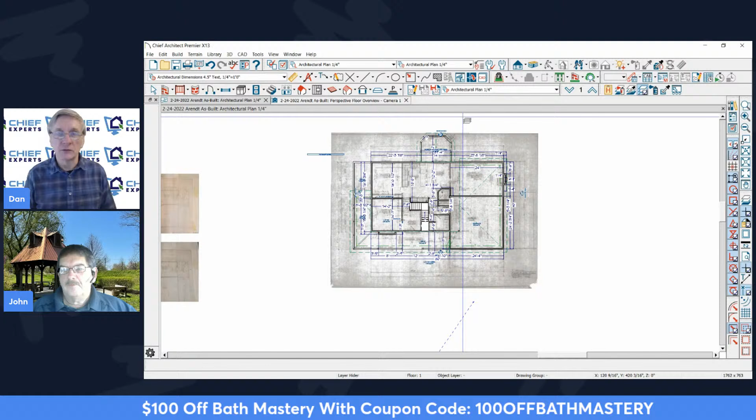Do you ever get a copy of a survey that you wish you had the CAD file for? Yes, yes. Okay, now here's the caveat to this one thing I'm going to show you.

Because sometimes - here's a project I'm working on. I've got the house out west of town that we're doing some as-built on, and they're going to add a whole bunch of additions. They got a lot of stuff going on in this house. So we've been doing - we did the Matterport scan on the whole house. That went really well. I'm not going to get into that right now.

We did a course on Matterport a year ago. If you want to check that out, Matterport's really cool. It's a neat system. And one thing I found out about Matterport is they have a little device coming out.

It's a little stand you mount your phone on, and you just go through the rooms and set that, and it'll do the auto spin on the rooms. So you can do your own scans without hiring someone. It's really inexpensive too - it's $60 right now to get this device. It's normally going to be like $180, something like that.

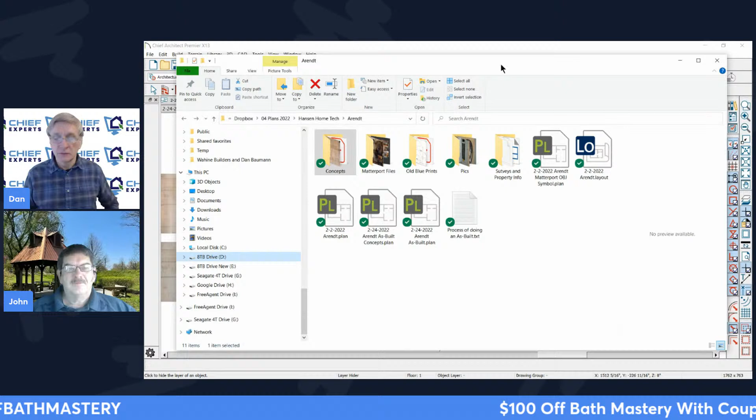I mean, you'll still need the Matterport - you'll need the Matterport account to have these different scans in them. Right, you know, I think that's their claim to fame. I don't think you can have them do the Chief Architect floor plan for it though. No, they won't, off your camera. You can if you get their equipment, but not off your phone. I haven't been able to find that.

Do you know that, John? Does anybody know? Will Matterport draw the chief file for you like Canvas will? I'm pretty sure they do.

Okay, I haven't seen it. I was looking for one day. I tried to get the DWG files, but they wanted like $800 for them. It's like, what are you, nuts? Maybe. It's a DWG, but it wasn't that much money. Well, because I went over a certain square footage, their price just jumped from a little bit to a ton. It was nuts. It's just like, okay, never mind.

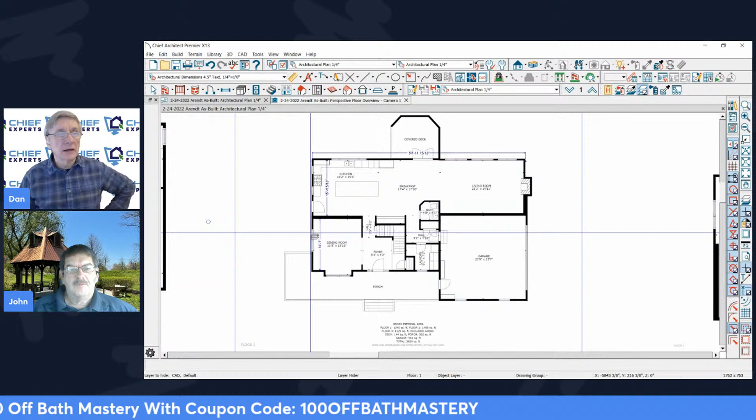But the thing is, they gave me these cool PNG files that look like this, from the Matterport scan. It's like, what do I need a DWG for if I got that? Right, that'll work just fine. I can trace right over it.

So those came with this particular house, and it was just over $3,100 they charged. I had a guy local here charge $475 to scan the whole property, and he did a few other things for us too on this project. It would have been between $275 and $425. So I thought for what we got, it was pretty cool.

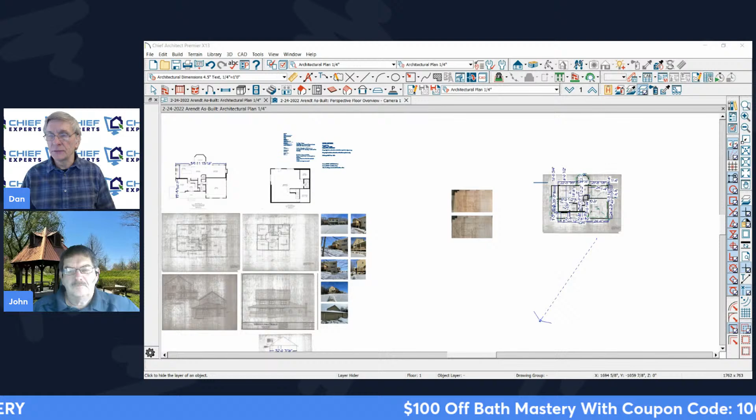But one of the things on this particular project, I've got a... sorry to go off topic there, but the owner, the contractor, sent me a survey. Okay, so it's right here. They sent me a PDF of the survey. And if you look at that, it's obvious that it was printed with a CAD program.

Oops, okay, come on. Trying to get my PDF over here on the screen so you can see it. It's thinking about something. What time is it? There it is, okay, so here it is.

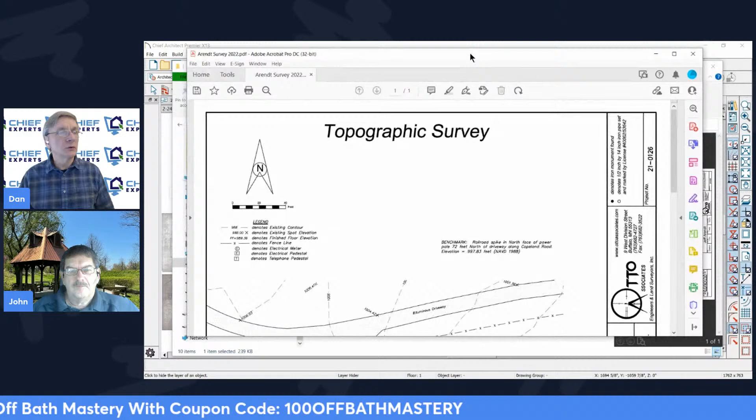So if you get a survey and it's like this, it's a CAD file. You can convert that to a DWG file for free, and here's how you do that. If you can't just call the surveyor and say, hey, send me the DWG file for that, I found a little tool you might want to check out. It's really cool. I just searched for PDF to DWG, and let me click on the link I'd saved here. So here's the website, it's called Convert PDF to AutoCAD.com.

So if you got any kind of PDF that looks like it might have been created with a CAD file - and I haven't read anything about this, I've only done it a few times - but the ones that failed were not CAD generated, they were hand drawn. So that's why I'm assuming that's the deal.

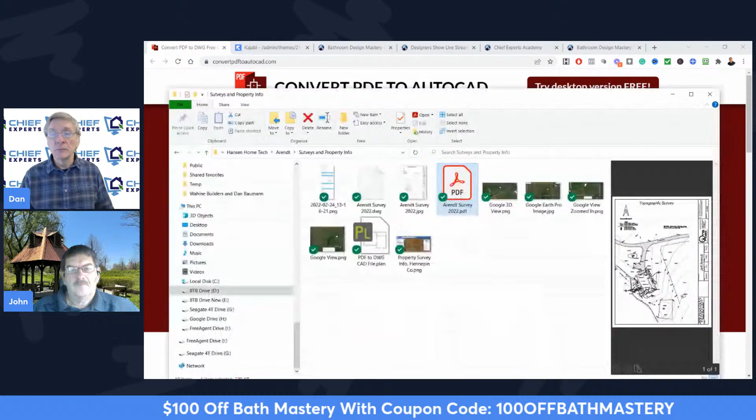So all you got to do is click upload. If I just take my PDF and upload it here, it's going to zip it through and convert it. It's going to give me a DWG file that I can download, and bam - I haven't read anything, I don't know anything more about it. Imagine if it was scanned off of a print, it wouldn't work either, probably. Probably not, but I don't know. So if someone wants to dig into this and let me know, I'd love it. I probably should read it.

I just thought of this right before the meeting. I got to show you guys this, because it worked really well, pretty cool. So all I did is click this, download the DWG.

As usual, what I do with Chief when I want to bring in a DWG is I never, ever bring the DWG into the plan I'm working on. The reason is because when you bring someone else's CAD file in, they'll probably have 200 layers in that file, or maybe less in many cases, but they'll have a lot of layers. Most of the layers aren't being used, but they'll still get imported, and that raises holy Cain with your layer list in the plan you're working on. So always open up a new plan and import your DWG into that, then massage the layers and lines you're working with.

So if I take this now and go grab that DWG file that was downloaded from the conversion... oh, that's already a plan file. What am I doing? Wrong one.

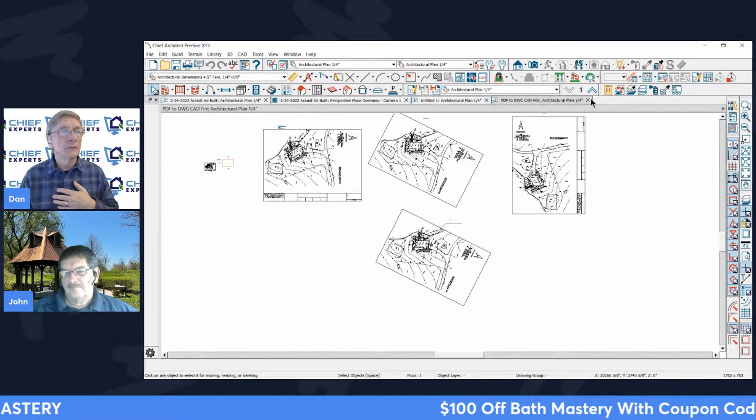Sorry, let me do that over.

Can you show us how to import the DWG into Chief? Here's the survey DWG - I'm just dragging it onto the screen. That's all you have to do, or you could go to Import DWG File from the File pull-down menu. Any file on the import list you can just drag onto the screen.

So then I'll go Next, and I always turn this on, and Next, and Next - that's important right there. Sometimes it might be done in feet, sometimes in inches. I believe this one was done in feet.

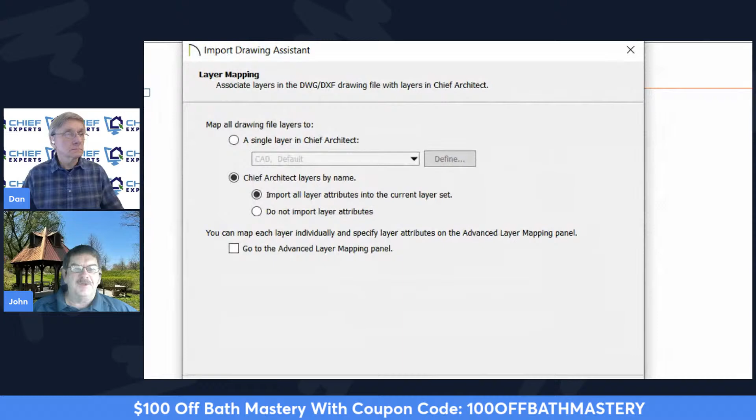The other thing that's really important when you're getting or sending DWGs to an engineer, you need to make sure you put it in a type that they can read. Like if they're not up to date on AutoCAD, you've got to get the version that will work.

Where's that again - I think it was right at the beginning. Maybe it's under export, when you export. You're trying to import it, but you can select different levels. That's a really important part, getting the right version of the program. So I always just do export the latest version, and if it doesn't work, I'll step back a little bit.

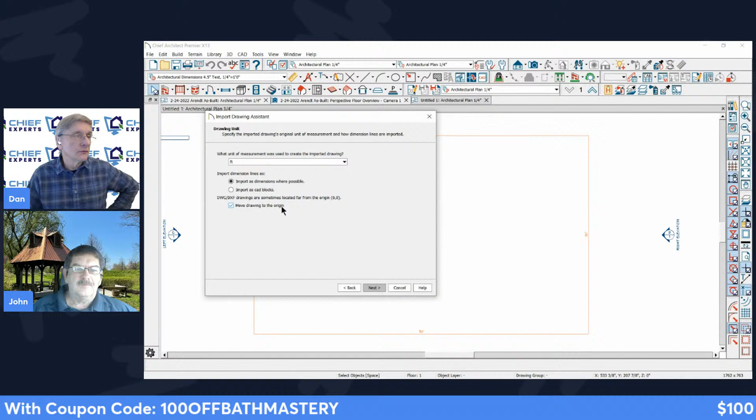Okay, so I'm going to go feet, import the dimensions, import as CAD blocks, and move drawing to the origin. Origin would be if the thing was set at zero-zero, which would be the middle of this orange box on my screen - it would come in there.

So then I just hit Finish, and there's that DWG scan that I got from that website. So it's all lines - that's not going to be one continuous line, it's going to convert it to individual items. The text is going to be lines, it's not going to be text, so you may end up deleting that and redoing it.

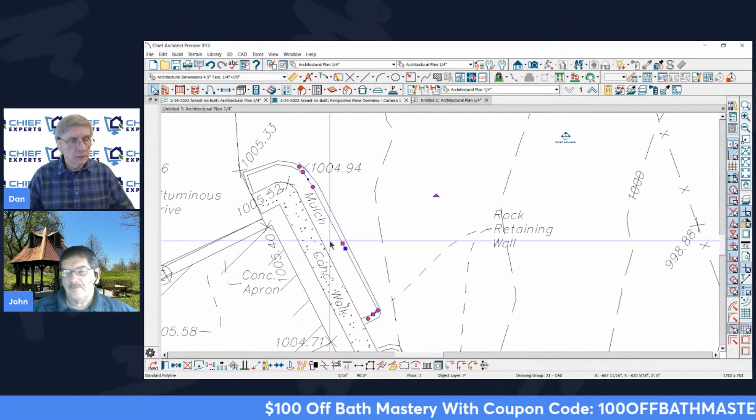And everything in this came in - did it come in one layer? Yeah, everything's on one layer. So doing the scan is not going to give you different layers for the different items. You're going to get one layer, which again isn't the end of the world.

So then you can just, if you have a dimension somewhere that you know, you can check that dimension and scale from that too. You can scale it like any other drawing. So I think the house itself was 60 feet.

So if I click on that line and open its dialog box and go to the selected line, then go to Number Style down here and switch it to feet and inches, I can see that something's not quite right there - it's not the right length. So this is not the right sized CAD file, so I need to convert this.

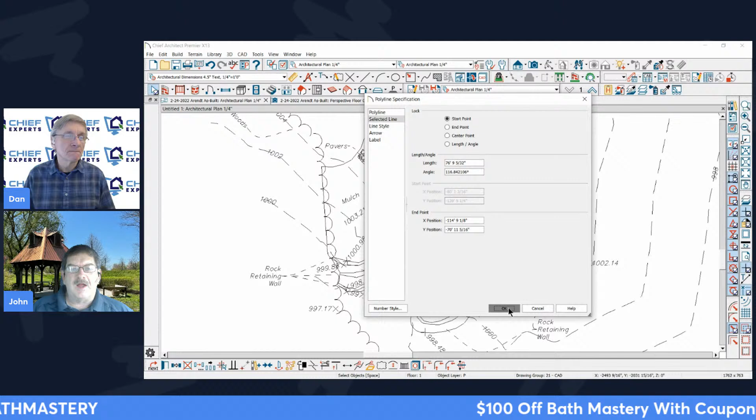So we should show them how to convert it, John. So how did you decide to do feet or inches, and how far off is it? I know for a fact that wall is 60 feet. I just selected that line, or find another line that has a dimension on it - the longer the dimension, the better.

So Number Style, right down here - when you click in a dialog you see this thing called Number Style. That changes the way the numbers display in these dialog boxes, doesn't do anything else. When I'm working on roofs, I'll always change my angles to pitch, so now it displays as pitch. In this case I wanted to see feet and inches instead of inches, so I changed it to that - now it displays as feet and inches. If I change the pitch, you'll see how that angle changed to a pitch. It's really nice - when working on different things in your plan, you can change the way it displays in the dialog boxes.

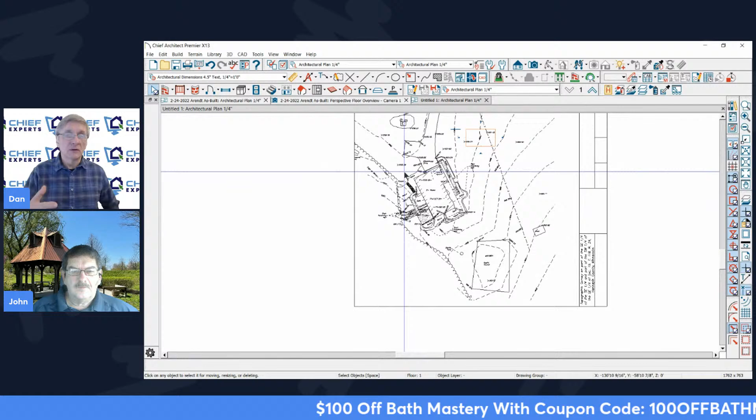So I had to rescale this drawing because it's scanned from a PDF - it doesn't know the exact size of it right off the bat. If you have a full-blown survey, you'll probably have a property line with a number on it - use that, use the longest number possible. Or if you know what size paper it was drawn on, you could use that. This one, I had no idea.

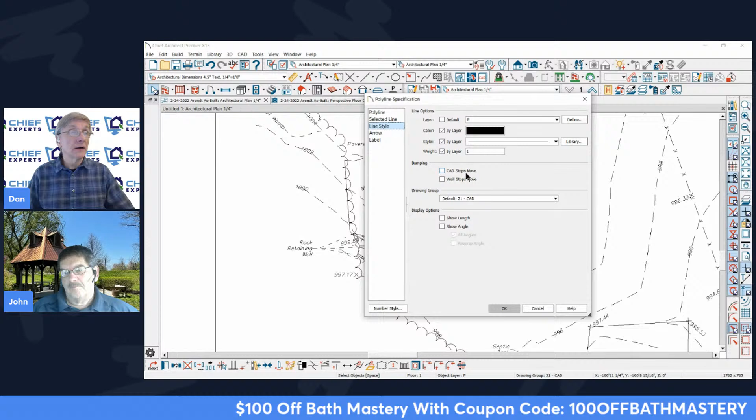So I'll rescale it using the same method we use for scaling a picture with an angled line. I'm going to go to line style and show the length of that line on the screen. There's the length of that line: 76.76 decimal feet, and I need that line to be 60 feet.

So what I'm going to do is select everything in my drawing. I'll just hit Control A. I've just hit Control A and selected everything in my drawing, and I need to rescale this down so that line is 60 feet, and it'll resize everything in my plan.

So we take that number, the number we want divided by the number it is. Number you want divided by what it is. I want 60 feet, I need to divide it by that number.

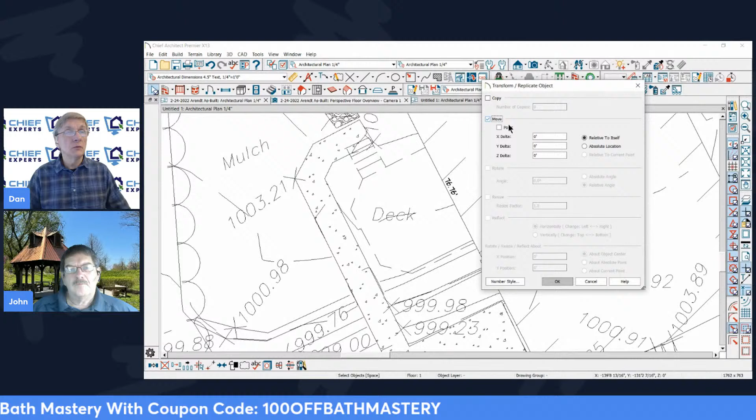So I'm going to go to my resize, or transform replicate, down here. I'm going to go move and put 76.76 feet. I like to convert it to inches. I don't know if you do that too, John, or do you still do this?

No, because you can do it from feet to feet, but you can't do feet to inches. Right, so 60 decimal feet, and I need to set this back to fractional inches. So I need to divide 720 by 921. I only use move to get this number, just to get the inches—I'm not going to use move when I'm done here.

Okay, so I'm going to uncheck it, and then go to my resize. It's not giving it—done. Oh, what's going on? Yeah, I got cameras in there—can't have cameras in there. That would do it. Got to turn those off.

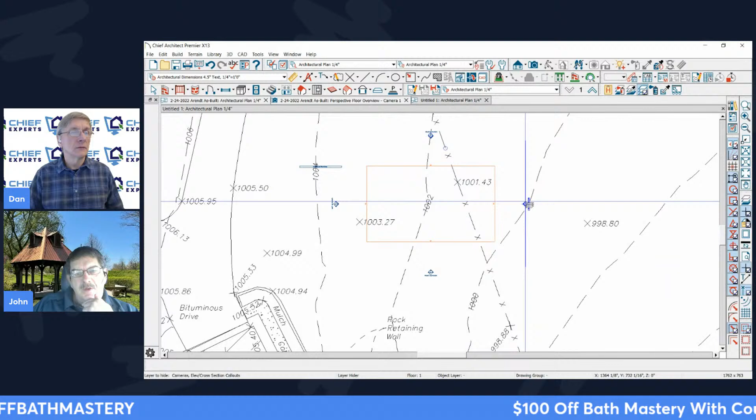Use my hide layer button—so I've added these icons, hide layers is one of them. Let's try that again. Okay, so transform replicate, and this time we'll check that we can resize. There you go—it's typically the cameras that do that.

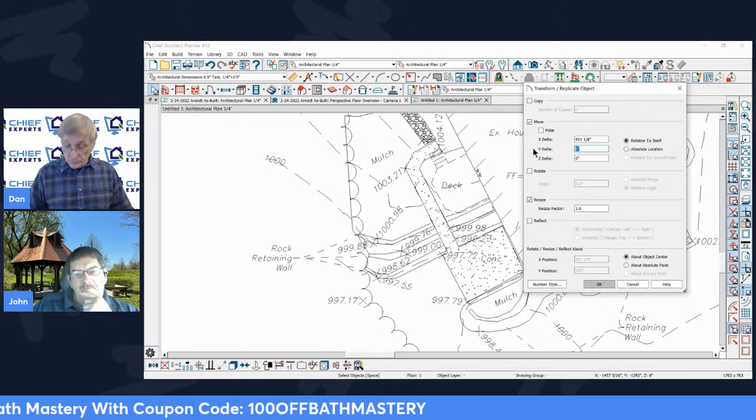76.76 feet by 60 feet gives me that many inches. So I'm going to go resize, I'm going to go 720 divided by 921. I'm doing all the math right in these dialog boxes. Okay, so there's my resize factor right there.

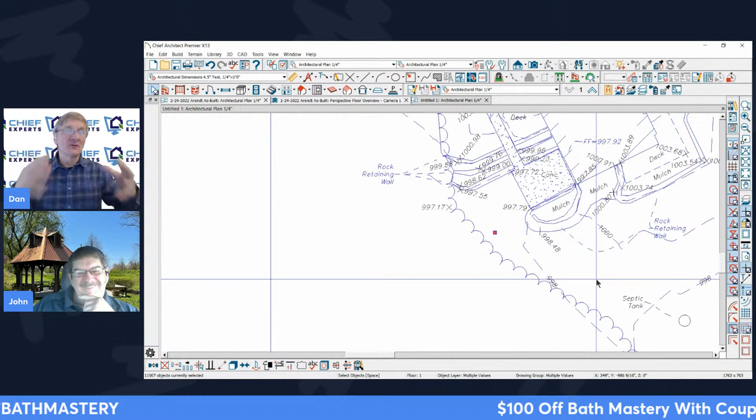All right, and I click OK. Now it's going to make this drawing a little smaller. That line I was just looking at should say now 60 feet, 60.01 feet. Yeah, I can deal with that. So I'm good to go now. So now I can put that in my plan, rotate it, do whatever I want with it, block it, clean it up, trace over the lines. That's my next step—I'm going to create the contour lines by tracing over these, and away you go.

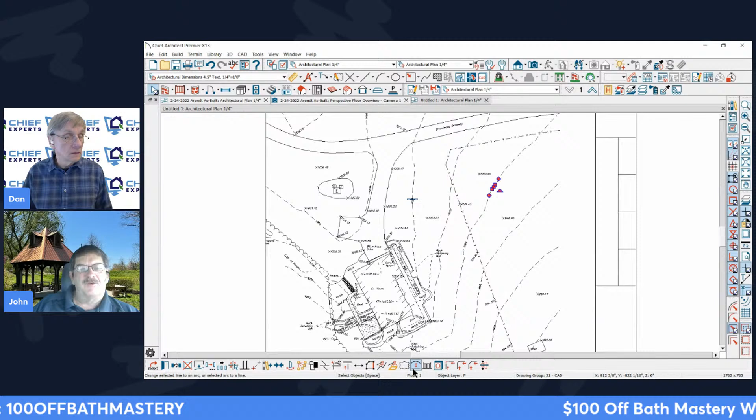So it works great. Do you have match properties in that? You probably do, don't you? What do you mean match? I want to click on one of those lines and see if you have match properties. I'm not following you—right here, match properties, right down here at the bottom. You select the line, you're going to do match properties. Everything's on one layer right now, so I'm looking for ways to sort the layers out a little bit. I want my elevation lines to be on their own layer. Oh, so go down to match properties.

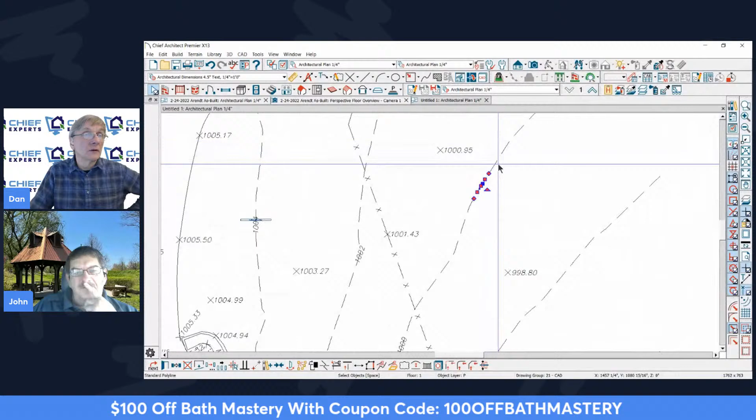What is match properties, John? The small box with all the little boxes, yellow. This one? No, over—oh, this one. Right, I'm there, sorry. Okay, got it. And then is there a line type you can sort that with? It's not, they're all solid lines. Line style, these are just—no. That's it, isn't it? Is that a dashed line? No, it's not, it just recognizes it as a solid line, wouldn't it? They're all solid lines, so if I open the dialog, it's a solid line. So they're not going to be able to do it like that. So no, that would be—so yes, if the conversion thing's good, it helps.

It's going to save a few things, but no, it's not going to do everything you want. It's not like having the real DWG file.

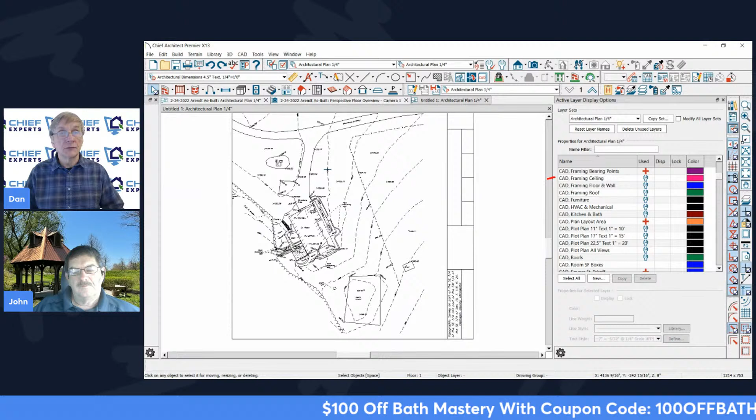If I had a real DWG file with a ton of layers, what I always do is go into each item and turn my layers on the side. Then I rename each item I'm working on, putting the word 'plot' or 'DWG' in front of it to define it, and turn that layer off. I continue doing that with each different layer in my plan until all the layers are off. Then I sort my list so it shows all the same words in front, and I know I've got just those layers to bring into my other plan. Then I copy and paste it to my other plan. It works great.

The colors — yeah, because from AutoCAD you change the colors so you can see them. A lot of times they come in yellow and different bright colors.

Anyway, that's a little tip for you that I wanted to show you guys today. So that's all I got for right now.

So Jim, it's just showing short solid lines, that's all it's doing. It's not really showing dashed lines — it's every line from that conversion. Optimally you want the real DWG file the thing was created with, but sometimes it's just not possible.

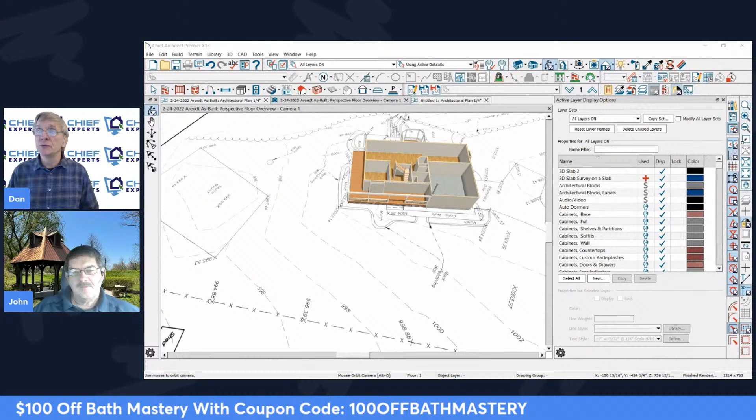There's another software out there I haven't used in years that will convert any picture or any PDF into a CAD file. It's pretty good, I need to dig into it and look at it again. If you just search for PDF to DWG, I think it'll pop up. I'm not going to do that right now, but it's like $250 or $300 to buy the software.

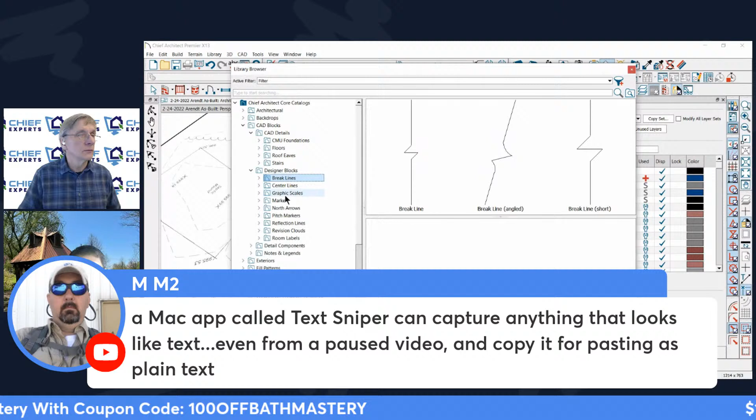I used that software many years ago to create these 2D symbols that you see. I don't remember where they put them, but I created a whole ton of symbols that ended up working with Chief, and they put them into the program. Here they are — I don't remember exactly where, but you'll see some 2D CAD details of designer blocks, like cars and plants and things like that. I just had some pictures and converted them, and it worked great.

Mike says a Mac app called Text Sniper can capture anything that looks like text. Oh, okay, so maybe it could capture that. Snagit has a text capture too now. Yeah, you're right, I could do that if I went to Snagit.

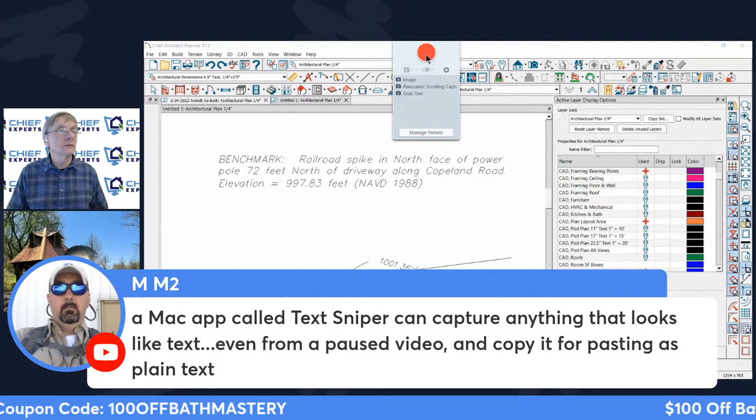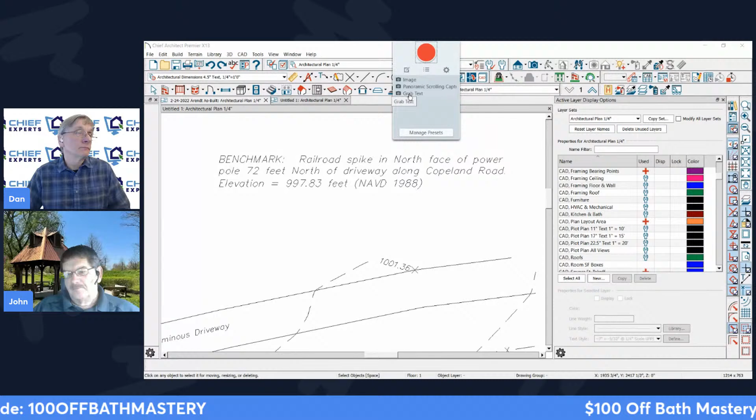If I took Snagit here and captured that text as a picture, I could tell Snagit to grab the text. Let's see if it does it. Yeah, you can actually do it — you can do it before you even bring it in, right off your computer, if you set a setting probably in the capture options. But yeah, I love Snagit, I use it all the time. Grab text, grab that, and just do that — let's see what I get. Bam, got it, so there's my results.

Can't move that screen over here — oh trust me, it came up just like it did before. So yeah, it works. There's lots of ways to do that.

Anyway, I hope... progeCAD has a built-in PDF to DWG converter. Who? PROGE, I'm not sure how you pronounce that — Projet CAD, Projet CAD. Must be French, I don't know.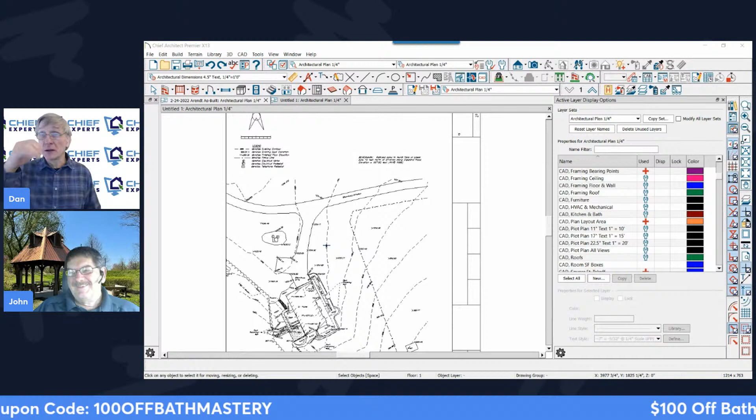Make a custom line type? How easy or hard is it to do that? Oh my God, you can't do that. Yes, you can. Let's see.

So I need to go to CAD, then to lines, then line style management. I haven't done this in a while, but yeah, I think so. Line style management, and I want to create a new line type. So you click New right here.

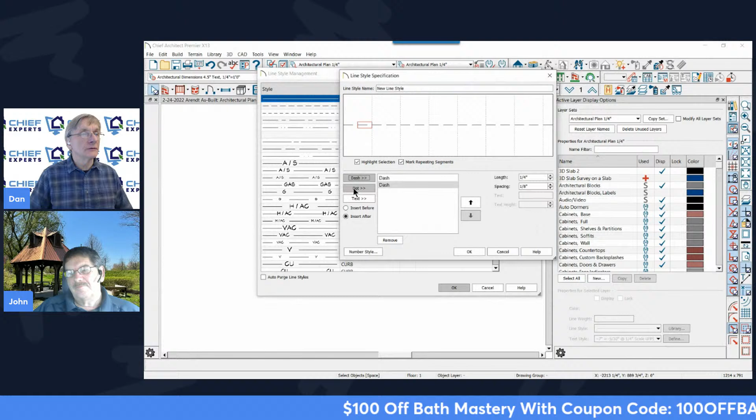So you click New, and I'm going to add a dash, a dot, and... ABC. And then I'm going to add a dot and a dash. Okay, so there's my new custom line style.

Now you can specify the length of the lines. Each of these can have a specified length. You can insert before or after, I'm not sure exactly what that means. You can change the number style, the font, the size, all of that can be changed as part of this. And then you click OK, and there's your new custom line style.

And even better yet, you can now click Add to Library, and create your own library full of custom line styles. Whenever you need to use them, you simply... come on, what are you doing, computer?

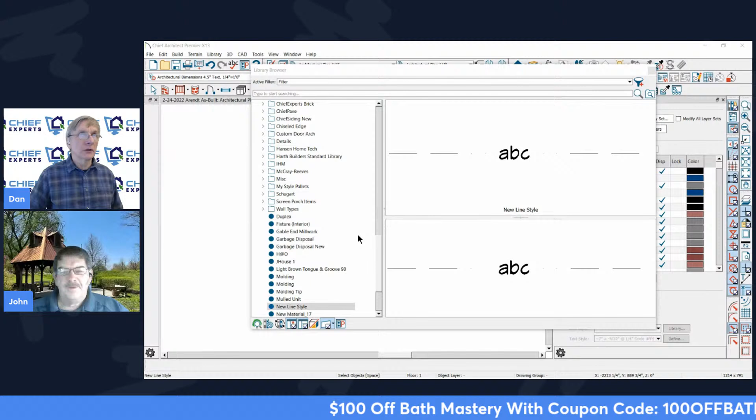Hello. Whenever I've created a new custom line style, I've had to put it in the library to use it. Do you have to do that? Yeah, I think so, because otherwise I think it's only going to be saved in the line styles for this particular plan.

Right, just like even walls—to use it on this plan, I had to put it in the library. Well, I would think you could just... maybe, I don't know. That's what I thought too. I don't think you can use it from there. Well, whatever, just put it in the library and draw with it. Right, that's what I always did, but I just wanted to make sure I didn't miss something.

I don't think so. But if I draw a line and click on it and open its dialog and go to line style, is it on the list here now? It should be at the bottom of the list. There it is, I guess it is. So okay, it is part of the plan, but only part of this plan—it's not part of any other plan. So yeah, you can create your whole library full of custom line styles.

So that was pretty hard. I don't know how you could probably figure that out.

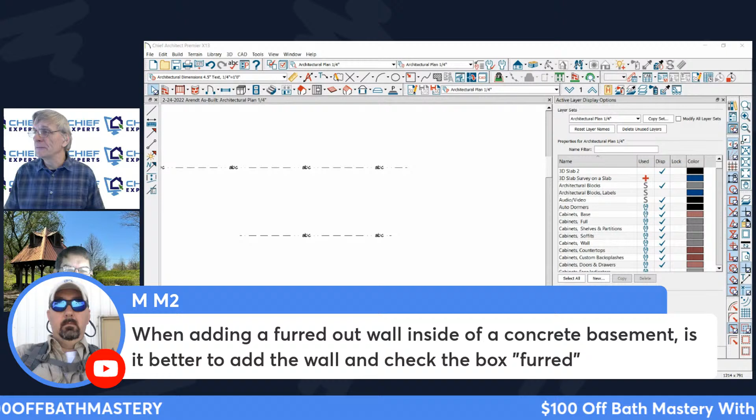So here's a question. Sorry, I'm being goofy. You've been burning the candle at both ends, Dan. So you're absolutely right, as far as being online and stuff. I was up really late last night, so I did burn that candle. So after I'm done with this, I'm going to take a nap.

So when adding a furred out wall inside a concrete basement, is it better to add the wall and check the furred box, or is it better to create an entirely new wall type that encompasses the concrete wall, the air gap, and the new interior wall? Here's why you want to create those as separate walls.

All right, so when you're drawing a plan, I'll just draw it. I'm going to go ahead and draw a box here, and I'll create a foundation. I'll show you what happens. If you don't care about the cross sections or the framing, then it doesn't matter—you could create it as one wall.

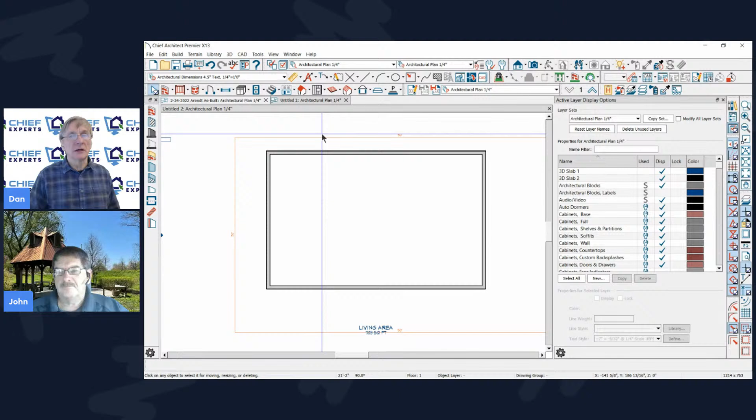But if you want to do a cross section through the model and have it work correctly, if you want the right square footage to the block instead of the framing, there are some variations you want to consider there. So let me just go throw a foundation in here quick.

And then I'm going to go grab a wall I have in my library, a wall type called interior floor furring with an air gap. Okay, so I've got a wall set up with a 1-inch air gap, and that's going to go against the concrete. And then I've got a 3.5-inch frame, a 1/2-inch drywall.

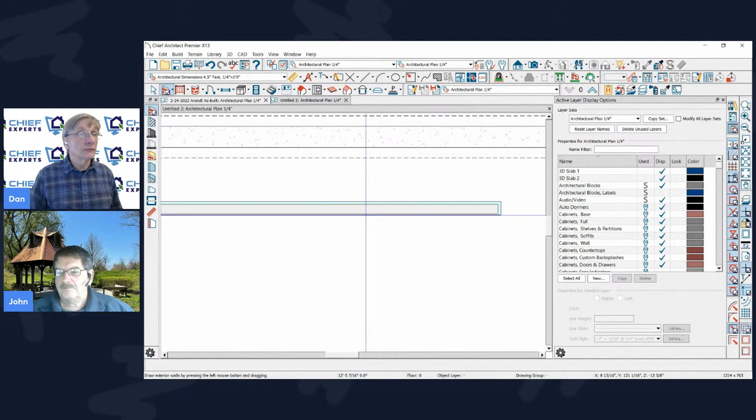And you can check this layer to be insulation if you want. And then I'm going to go ahead and draw that. So the first thing I always do is draw one in my plan, and then open its dialog box. I haven't—can we set this wall type up now? But we probably could, to be a furred wall. I haven't looked at this for a long time. No, I don't think you can.

So that's under structure. You want to name it a furred wall. Anytime you have a wall against another wall, you want to call it a furred wall. You really got to do that, otherwise it can mess up your plan.

If I didn't call this a furred wall and put it against this wall, it could potentially create a room in there. So if I change the ceiling height of this space, it wouldn't change the ceiling height of that gap, even though you don't see a gap. So you got to be careful. Making a furred wall takes care of that.

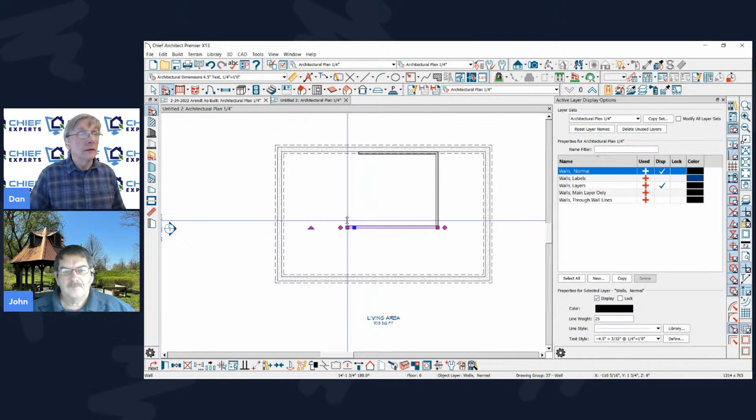So now I could just go in here and kind of trace it around like this. And then if I want to finish it off with some interior walls, I'll do this, and I can run that into that. And then I just push these against the outer wall.

The cool thing about doing it like this is when I frame the plan now. So if I frame that wall and do a cross section through it, the bottom plate's going to be sitting on top of the concrete. If I don't do it like this, the bottom plate would be sitting on top of the footer, coming all the way down here, because that wall would be all one big object.

Chief won't adapt for that. Plus, the other benefit of doing it like this is when I do a room label now, see how it's not going to the concrete? It's going to this.

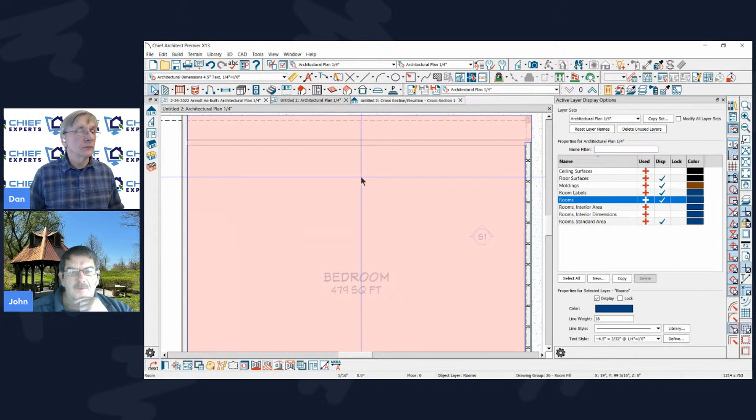But it's still going to give me the square footage all the way to that wall, I think. I don't know for sure, but it really pulled the wall away from it. Let me throw a name in here for something, I'll call it a bedroom. So we got 479, yeah it's the same, so I think it's counting all the way to the concrete. I don't know if that's right or wrong, but that's what it's doing.

I suppose you want to see it, huh? So any settings for the window? Yeah, for double walls, you have under the casing, you have double through, enlarged, double, or not through. Through is going to put it through and just put a little extension jamb on it.

Enlarged is going to treat it like this, where the sheetrock wraps around into the casing, so it gives you a bit different look. And then I think double would put 2 windows in that same spot, so you'd have an inside and outside window, one in each wall. Sometimes if you have a door, you might want 2 doors, I think that would put 2 doors in there. And then not through, it's not going to put it through both walls.

Other than that, I don't think there's any other settings, is there? I think that's pretty much it. Yeah, they do work well. Okay, what else? Here we go.

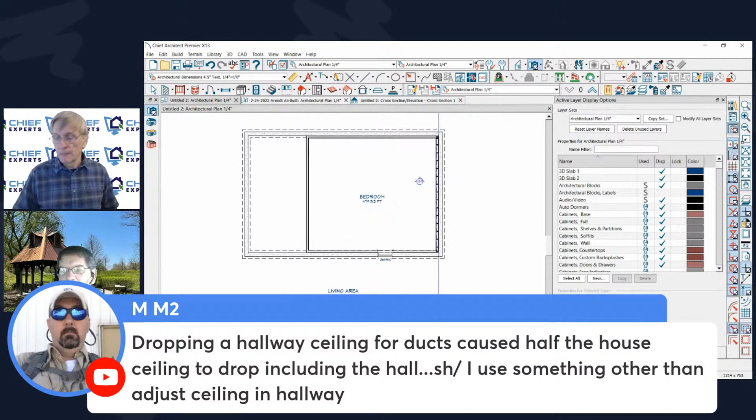Here's a good one: dropping a hallway ceiling for ducts causes half the house ceiling to drop, including the hall. Should I use something other than adjusting the ceiling in the hallway. Here's what you want to do for that.

So if I've got a room here, a bathroom with a drop ceiling, if I drop the ceiling in here, that means the floor above is going to drop down into this room. I don't want that. So I need to go into that room, go to structure, then to ceiling structure. I'll leave the ceiling structure set to 5.5, but I'm going to edit the ceiling finish. I don't remember if it matters if you do it in this one or this one. I did it the other day in this one and it worked fine.

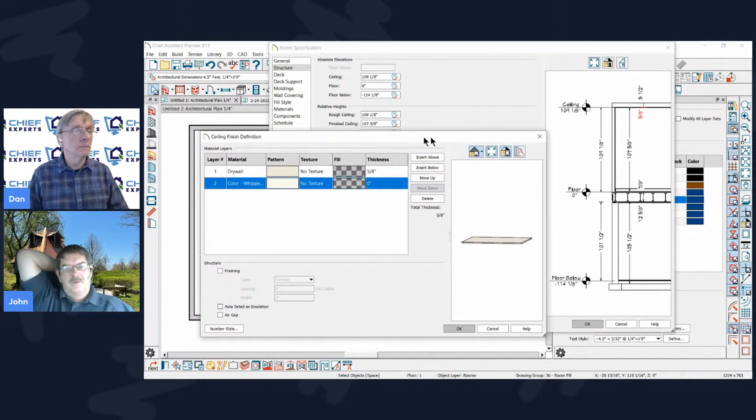So what I'm going to do, when you go to frame it or model it or show a section, it will show it differently depending on which one you pick, I think. I don't know, let's check that real quick.

So I'm going to insert a couple layers. I'm going to leave the drywall at 5/8. I'm going to change this to framing, make it 5.5 inches, 2x6, and then I'm going to make this a 12-inch air gap. So now I've essentially got two ceilings.

I got the one that is going to be the floor, and I'm creating a drop ceiling in the room below. So now I'm going to call this insulation air gap, and I'll make that 12 inches tall. So this is what I've created.

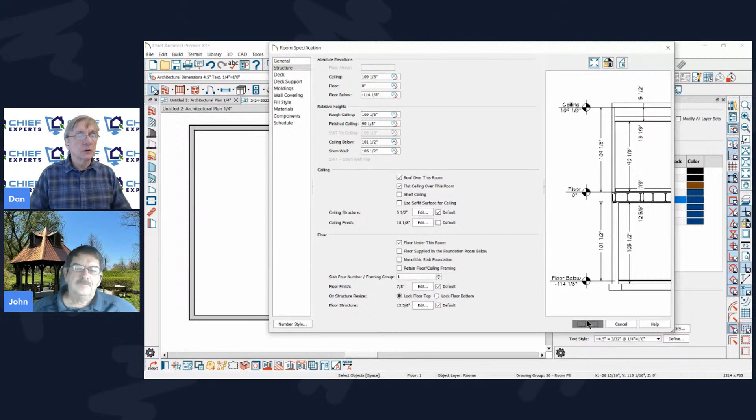You can just look at it right here. There's my air gap, framing, drywall. Click OK, click OK. So now if I do a cross section through that, you will see - whoops, let me straighten that out - there's your drop ceiling, and it's not going to mess with that.

So if I go add a second floor here, it's not going to mess with the floor at all. The floor will just build right over it. And there's my air gap right there. So that's created a different ceiling.

And if I go frame all of this, let's just run through the floor framing. Let's go ahead and build the floor framing, ceiling framing. I don't have a build ceiling framing here, so we may have to put the framing as part of the actual framing thing. Let's go do that real quick.

Let me change that quick. So I'll go into the structure again. Let me go set this back and delete these two, put that back the way it was. I'll go edit this, I'll go insert below.

5.5 plus a 12-inch air gap. And this top one, that'll end up being the floor joist once in a second floor situation, so chief will adjust for that automatically, I believe. Insulation air gap - there you are. Click OK and OK. Now it's showing the framing there.

Let's see what happens in our cross section. So let's go build our framing again and see if we get our build ceiling framing. Still not getting a build ceiling framing here.

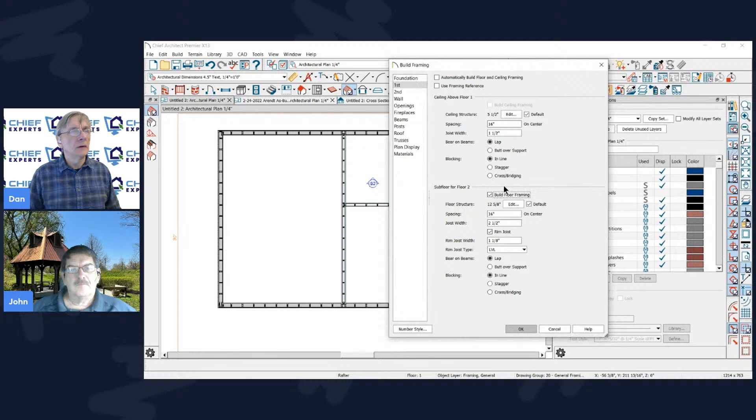Built my floor joists. Okay, yeah.

I get that, but that's not going to build the ceiling. Come on, I just made this work the other day. What did I do? I'm not getting my framing. Huh, I don't know. What's different, John?

You're on the first floor where you have that room? Well, I just double click on the framing, and I made this room bigger, so now there will be ceiling framing there.

Because it wasn't picking up that I wanted ceiling framing there, and it's still not picking it up. All right, I don't know, we're not going to spend time on it right now, but that's how I do it.

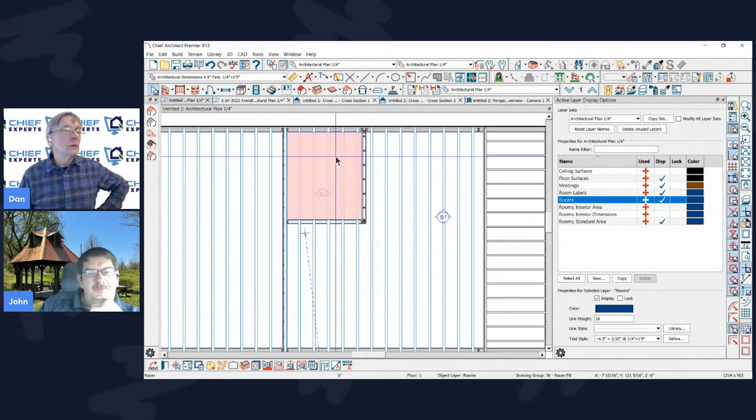You didn't do it with a soffit before, did you, or something like that? No, I did it exactly like I did here, and it worked perfect. I got the framing in and everything. Here I'm not getting anything now.

Once you figure out how to do the framing, the other cool thing about this is - go back to that. Something was weird there. Where? In that cross section, in the elevation. Why is it showing the floor framing just underneath that one room? I don't know, that's what I was just going to go check.

So because I'm going really fast here, I probably screwed something up. All right, so anyway, what I was going to say is doing it this way, you could also make this a room type, couldn't you?

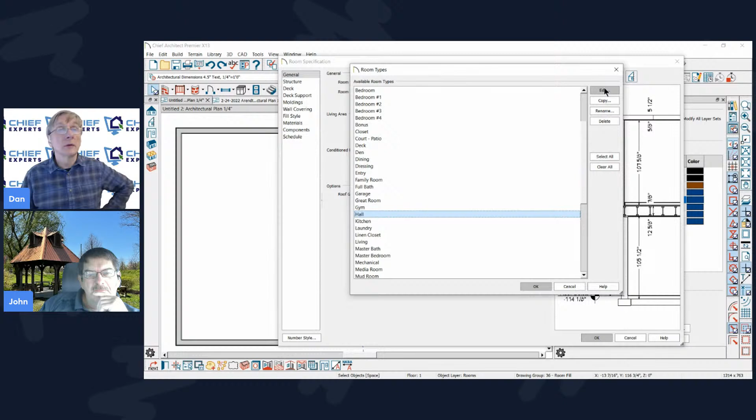What do you mean? With the drop ceiling, like if this was a common thing that you did, I suppose you could make a hallway with a drop ceiling and just have the hallway be wherever it's dropped, be that room type. Yeah, you could define it like that. Absolutely - let's say you got a hall and we want to make a copy of that, and we'll call it hall with drop ceiling.

And then I could go in and select this, and then I could go under structure and set up what I was just doing there. Edit, add that stuff in. So when I use that room name, it would automatically put in whatever you've specified here. Let's try that real quick. Let's go back to the way I was doing it before. So let's insert above.

5.5. I tell you, I've been working on some really weird stuff lately, and she's been kicking my butt. I don't know what's going on with it, if there's some bugs going on or something. I'm using X13. I'm not even using X14.

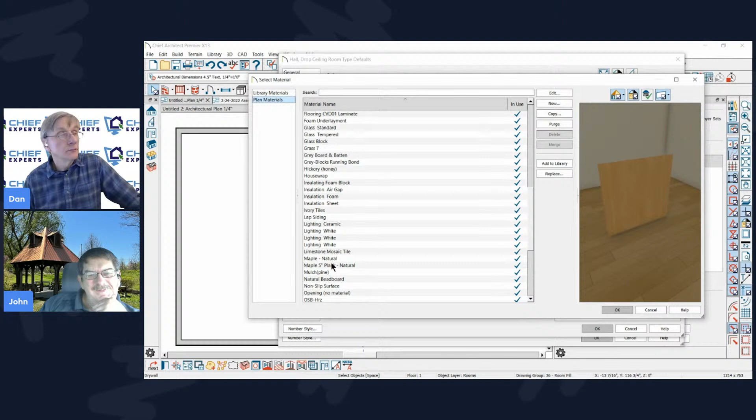Let's see, what am I doing here? Framing, for framing. There we go. And it shouldn't matter if I'm using insulation air gap. Okay, 12 inches. Okay, so now when I use that room name, let's build a little hallway here. I'm going to name that hall with drop ceiling.

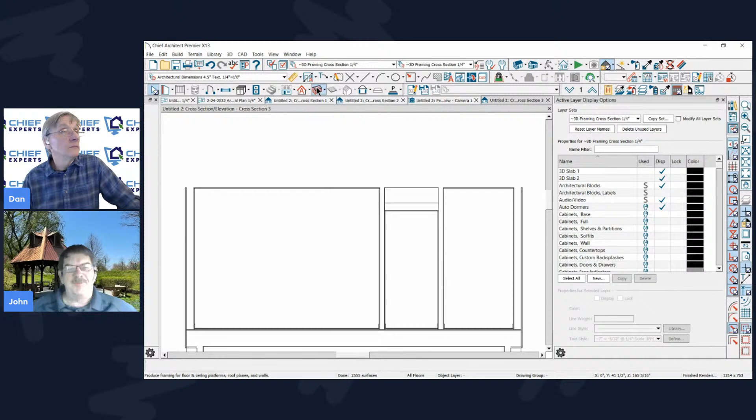Click OK. If I do a cross section through that, did it do it? It did it, by golly. Look at that, look at that. Cool, I love these shows when people ask questions like that. Just got to figure it out. Yeah, yeah.

So another way to do that, you could have just put a custom ceiling in that room too. Yeah, that's true. Trouble with that sometimes is if you draw a custom ceiling plane in here and you have walls on the floor above, that acts like a roof. It'll cut those walls off sometimes. Oh really? I've had that happen on plans where I just couldn't use that custom ceiling. Again, why it's not framing it like it normally does, I don't know. I'd have to go play with this a little bit, but that's generally how you do it. So try it both ways, try it with the bottom one or the top one and see which one gets it to work.

Next, what else we got? How would you show a double top plate on a concrete wall?

You go to, is it the walls setup? It's under wall type. It's under foundation, isn't it? Is it, yeah, you're right. It's not under the wall type. So that's a foundation default.

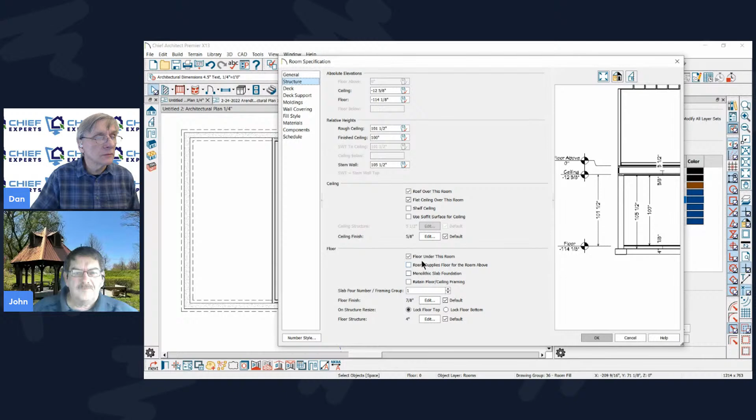Can we do that by room? I think we can do that by room too, under structure. Slab pour, maybe not. That might be a framing thing. Let's check our defaults here. So we're going to look at foundation defaults. I don't think it's there. I think it's part of framing.

It's under one of those tabs on the side there. Option, I can't see the stuff, it's too small on the screen. Look at edit default foundation wall. This one? No, the next one down. That one, yeah. Oh, that just opened up the wall dialog, and here, yeah, there it is. Sill plates, but that's below. Is that below or above? That's above.

We'll have fun, we'll throw 4 of them on that bad boy. Okay, and then if I frame this, build my framing... you shouldn't even have to build your framing. It should have pushed the foundation down so that it was showing. Yeah, did it not do it? No, it didn't do it. So, but that's how you do it.

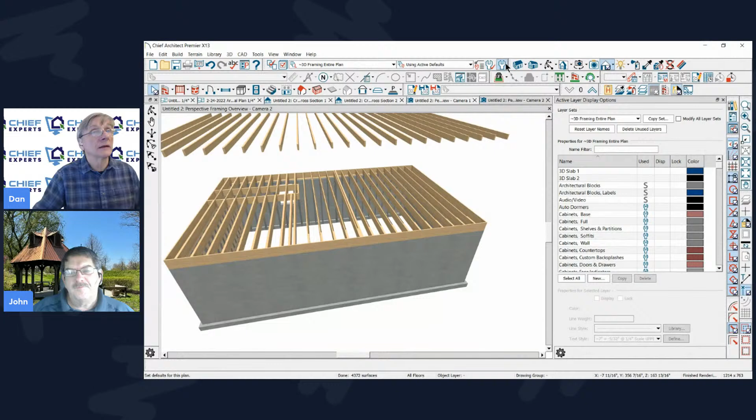And you can set that as a default for your whole plan, under, again, that was under foundation, and then default foundation wall, and then number of plates, sill plates, that'll be on top of that wall. I've done this before and I know it works, I just, again, I'm trying to go really fast here. It's hard to pay perfect attention to everything I'm doing when I'm going 1 million miles an hour.

Here's a question: have you been having this happen? I have, and I haven't taken the time to figure it out. Not centered on my screen, the view opens high and to the left. It's really small and high on the left when you open it. Generally, when that happens, that means you got something off. I mean, not always, but generally. Here, let me just go full screen.

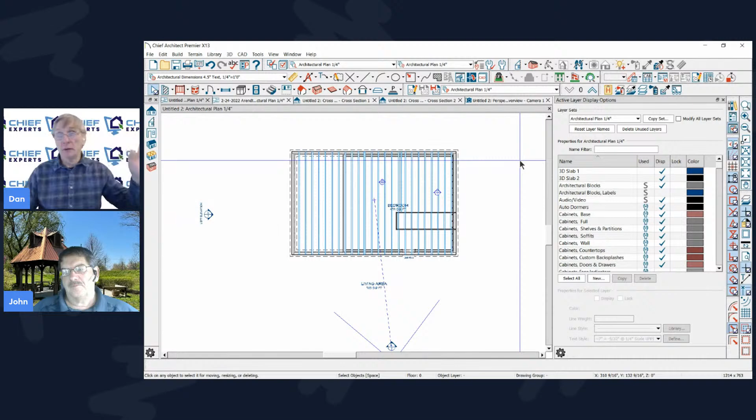I don't know why we need to be showing this. When that happens, generally that means you've got something drawn off to the edge somewhere. Something can get moved inadvertently, you accidentally put the wrong coordinates on something. There's lots of reasons why it can happen. Let's see if I do an elevation here. There's my little elevation, it's because there's something off over to the edge over there. So that's generally why that happens. So what I normally do is I go to my screen on each floor and I hit Control A. Control A will select everything on your screen. If the layer for that item's locked, it won't work.

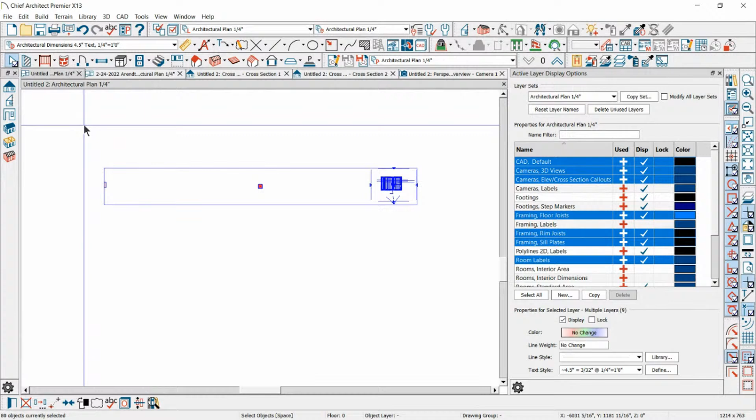Make sure you go to All Layers On, modify that, and make sure nothing is locked. Make sure there are no layers locked, because sometimes if the layer's locked, it won't find it. When you do that, Control A, and make sure everything is displayed and checked in for the all-on layer set. Then when you do the Control A, you should find it.

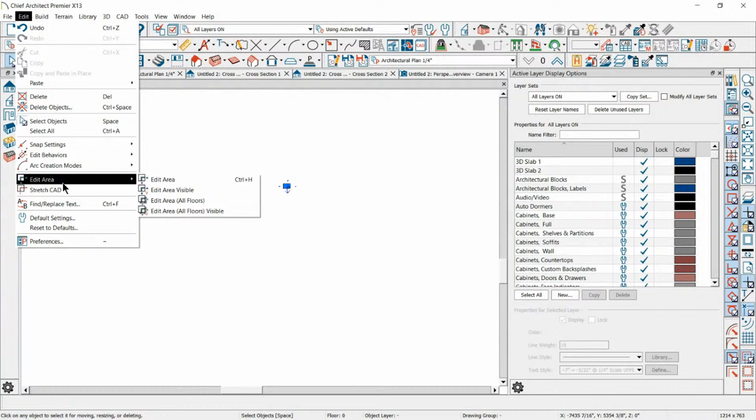Another way to do it is to marquee select each edge of your plan until you find it. If you still don't find it, and the little plan is over here to the left, that means there's probably something over here. You could always try an edit area, all floors, and draw a marquee around that part of the screen. Let me see if I can get to that thing I drew. Yeah, there it is.

So I can do an edit area, all floors, and delete. Then you should be able to tell too, if you do a fill window, F6 on the floor plan, it should fill that way too. Otherwise it might fill like that. One way or another, there's something in your plan causing that.

X13 has that new setting too, where you can automatically set the camera to have a certain width and a certain height. That would be something to look at, maybe—clip width, clip size. As a default of the camera, you can do it.

Yeah, I just double clicked on that. Or that you're talking about each individual camera can have that—each individual camera could be different too. Yeah, I think if it's a saved camera, you can. That's right, because you can go on a camera and tell it to. It's right down here: clip the sides after a certain number of inches.

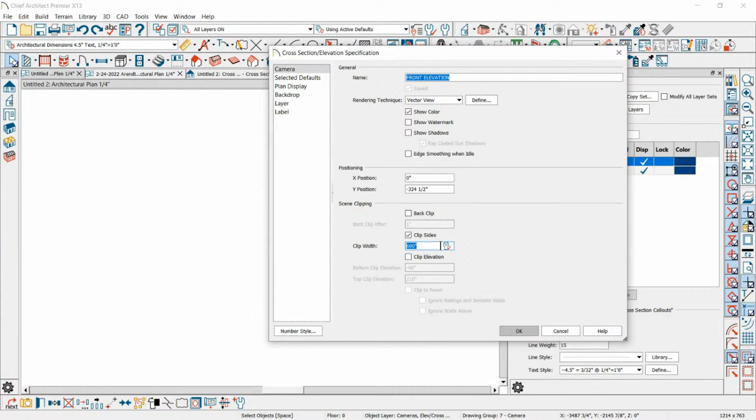Yep, mine's 600 inches. So if I set that camera to clip the sides after 24 inches... well, that's not the camera I wanted. I wanted this one. You can do it in the elevation too. There it is, yeah, this is the one I was doing. So when I look at my elevation, what do I got going on there?

You got 24 inches wide of your house there. Oh yeah, look at that. You didn't set the elevation though—you need to set the elevation of it. I thought I did. No, you just did the width.

There's another button you had to check to give you the option to set the elevation of it. Damn, there's always another button. Right there—that's a negative number for the bottom and a positive number for the top. All right, guess it, there's always another button.

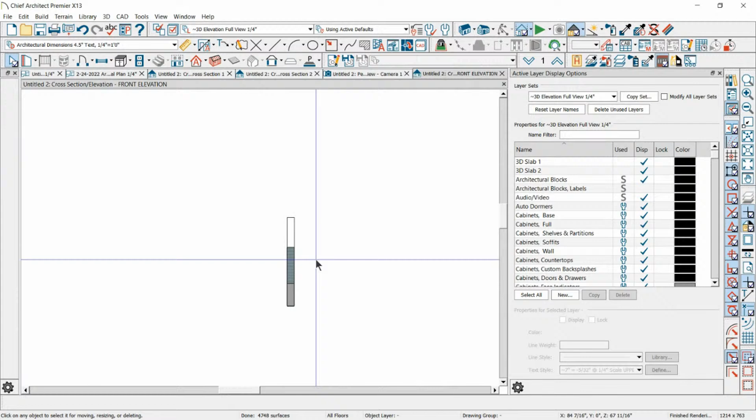Yeah, so now it's not so high, but yeah. So then I could go in there, I think, and manually click on it to drag it out. I think I can do that to expand it. There's a good point here too.

In the saved plan view, if you check the box next to remember location and zoom, then anytime you leave the plan view and its position has changed, it will save the plan view. Problem is, with elevations, you don't have plan views, do we? So if I go into an elevation, I have a layer set, I have a default set, but I don't have a plan view. So I have no way to save that view in that camera, I don't think.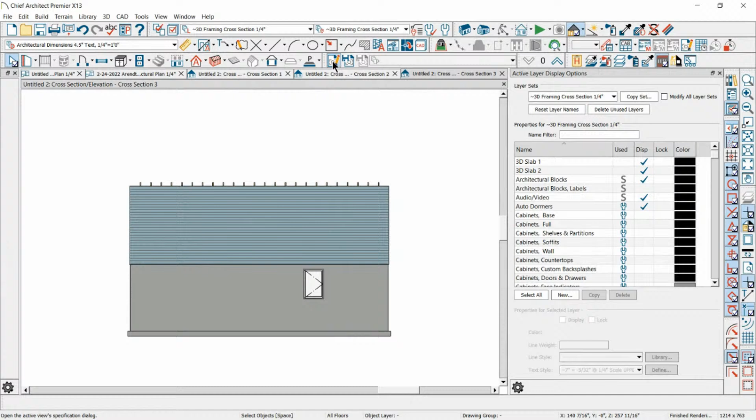Let's try this: Edit, let's hit Save Active View, and see if that opens up now. Okay, so that did work. So hit save. We don't have a list of plan views, but when you're in an elevation and you're zoomed into a spot, we can tell Chief to remember where that camera left off by clicking Save Active View. Then when you close that camera, you can click on it and it should open up to that zoomed spot. So yeah, it does work.

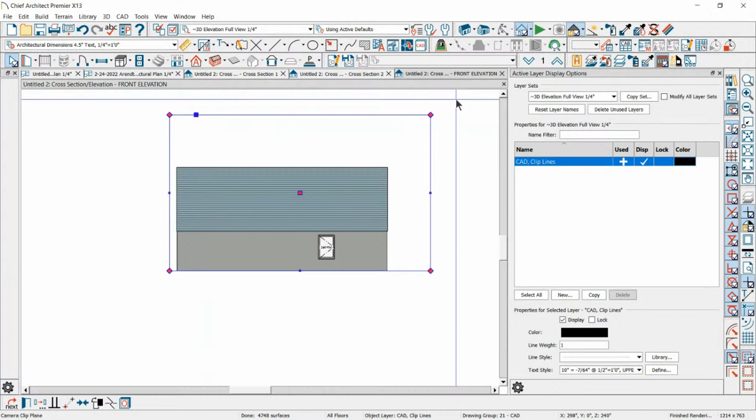Okay, cool, good point. Can you please explain the convert to symbol tool and how it is useful? Convert to symbol—what are we converting to a symbol? Are we talking about creating a library item? Convert to symbol—any item?

Any item. Well, here, I'll show you something I just did last night. I'm working on a plan, and I needed to create some different things. Let's see, it was this one right here.

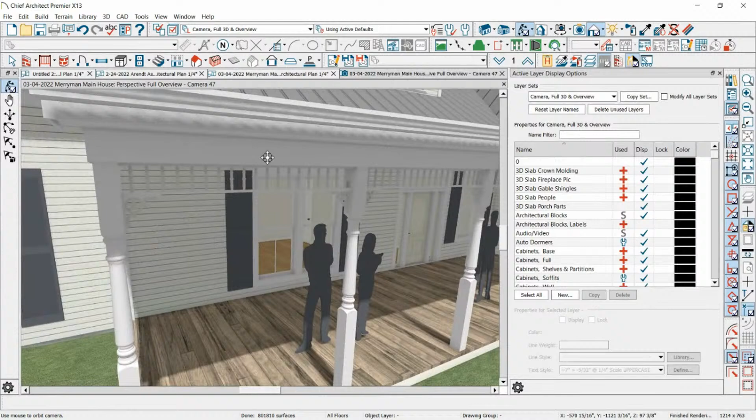So we're doing a house where the owner wants some Victorian embellishments. One of the things they want is some brackets on their porch that are Star of Texas. Oh, cool, like that. So I made that last night. I made these little things up here, and I made that into a symbol.

All right, so all I did to make that, let me turn the shadows off. There, you can see that better now. First of all, I went online and found a picture of the bracket we wanted, which was helpful, because Mike's saying, I want a Star of Texas there, and I thought, what the hell is that? I live in Minnesota, I don't know what Star of Texas is, but now I do.

So anyway, this is what I ended up with in my CAD drawing. I scaled the picture to about 12 inches, which was kind of what I wanted. I traced over it and created the different shapes I wanted. I created that one, and then did a reflected copy over there.

Then I created two circles, and the star was the hardest part to create because I was trying to use this reflect-five-times tool to get those points on there, and it didn't work. Anyway, I got it drawn.

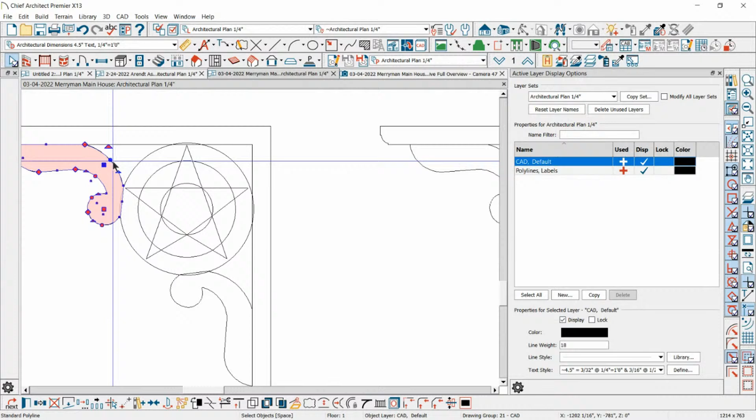Looks like this. When it's all said and done, after I joined all the elements together, you're going to use a little tool here that can join things, it's this tool. Let's see, it didn't work here because this is not a circle. I had to convert that circle back to a CAD line, and then it worked. It was one of those weird things.

I'm looking for these tools right here. So I can join these elements together now by hitting this tool, make a new outline. And there's my outline, same thing I did with the star. That's how I ended up getting to this point where I had this drawing.

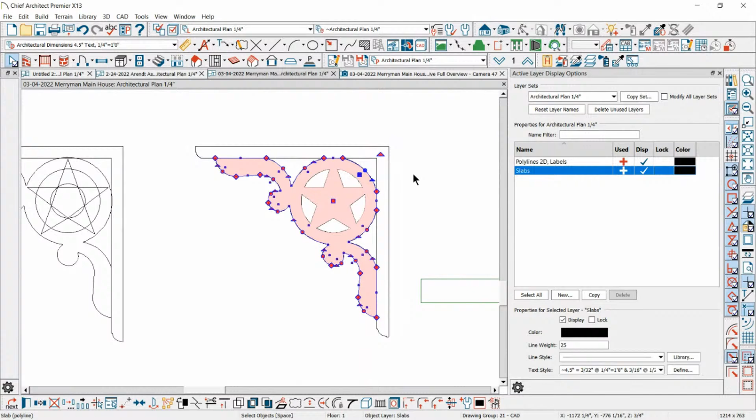So this is 1.5 inches tall, and this is 3/4 of an inch tall. So when I go look at that... I think it's laying out here somewhere.

By the way, if you're rolling in your mouse and it goes too fast, hold your control key down and it slows it down.

Oh, that was the gable end. Here's that bracket. Okay, so there's what I got, there's my 3D object.

So then I would click on this, and then click this little chair icon here, convert selected to a symbol. So pretty much anything you click on in your plan now, you can click that button and make a 3D symbol out of it.

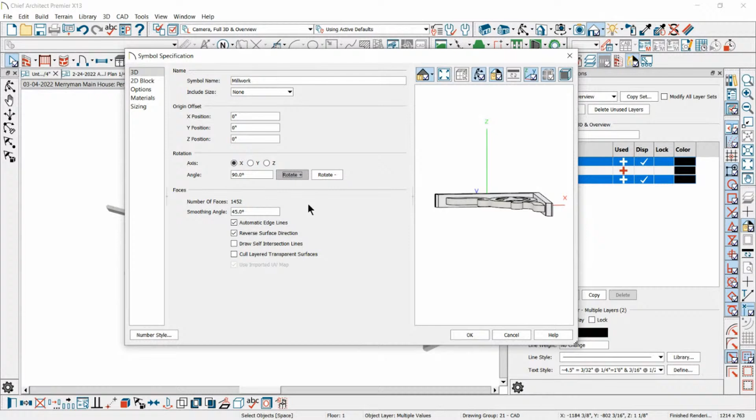So I wanted that to be a millwork. I want to show advanced options, click OK. Here it is laying down. I need to stand it up, so I had to rotate it standing up. Okay, so now I can see the Z is going up and down.

You can use the rotate any way you want, you have different things to do on it. So here I go, Star of Texas - oops, my caps are on - and that's in my library now, so I'll have access to that forever if I want to.

In fact, I started creating a little library full of some things I was doing called... what was that again? I called it... did I call that... it's under this one... I was calling it gingerbread. So there's that thing I created.

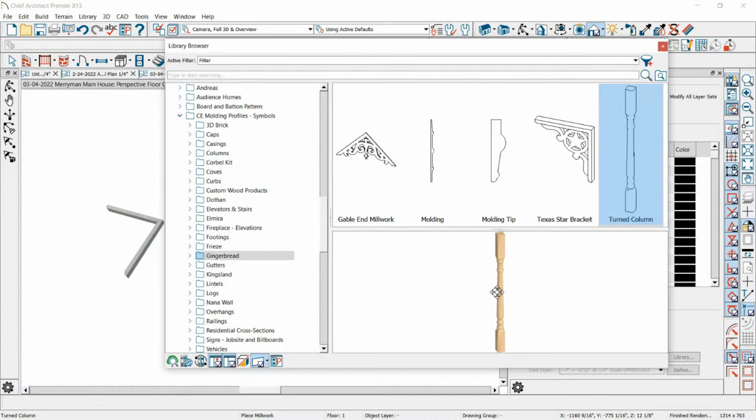I created that, and I wanted more of a custom post on the porch. Actually I found that online, but the little things above the brackets, I just made a little profile and attached those to a molding. So it's just little things - you can make anything into a 3D object, that's how you convert anything to a 3D object. So anything you click on, you can make into a new object.

So if I click on those double windows, make them into a new item - these different elements do different things. The windows one, they still have screwed up, it doesn't insert into the wall properly, you've got to make lots of adjustments to it. Anyway, but most of them work just fine.

And if it's a post or something like that you're trying to convert, you can actually set it up so it will stretch in the middle of the post and not the ends. That's where I was getting nuts last night, I was trying to get this post to stretch to the right places. It wasn't working for me, it just was not working for me, it's driving me freaking nuts. I finally gave up on it, added ends onto it, and made it a new object.

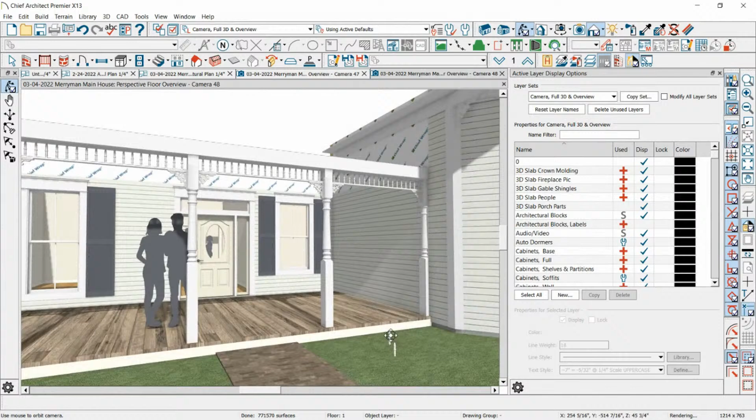I've done it many times, John, and it works fine. So when you click on something, like I'll click - no, that's not a symbol, there's an object. So if I go edit that object, and you can show us where that button was again.

The chair - oh sorry, so you can click on it here. Let me just go into my library. You can do the same thing from a library. Click on an object - so if I want to click on that turned column, I can right click on it, and there's that little chair. Okay, that's the same symbol. You can do it right from the library without even having to put it in your plan.

So if I want to open that symbol and do something to it, I would go to sizing, and then typically you would set some stretch points, which I thought I did right, but I could not get it to work. I could not get it to stretch where I wanted to for some reason. I don't know why. So anyway, I just made it the right size.

These stretch points make it so that when I stretch this post out, it only stretches this - it doesn't mess up all the things in between. Looks like they're too far apart. Oh, that's just me playing with different things again, trying to get it to work. I could not get it to go.

I tried 2 and 6. Just technically 2 and 6 now, it should stretch in between here. When I pull that down, it should just only stretch that. But it didn't work, so I don't know why. Anyway, I don't need to bore you with my problems, but just know that you're not the only one that has trouble with things.

Do you have one more question? Yep. When I delete attic walls that are not working correctly and then they don't regenerate, how do I make the software regenerate the attic walls, especially in the gables?

All right, the reason it's not regenerating - let me go ahead and add a gable roof to this house. I'll make those gable walls and then I'll go build the roof. Attic walls are walls that are generated by the program automatically. All right, and I'll just turn that off. And so when I go up in my plan, there's some attic walls - Chief just generated those for me.

So what happens is sometimes they're in the wrong place. You want to replace them with a different wall or something like that, or you just want to get rid of them, so you hit delete. It says yeah, it's going to modify that. Okay, that's cool, so now it goes away. It's gone here in 3D.

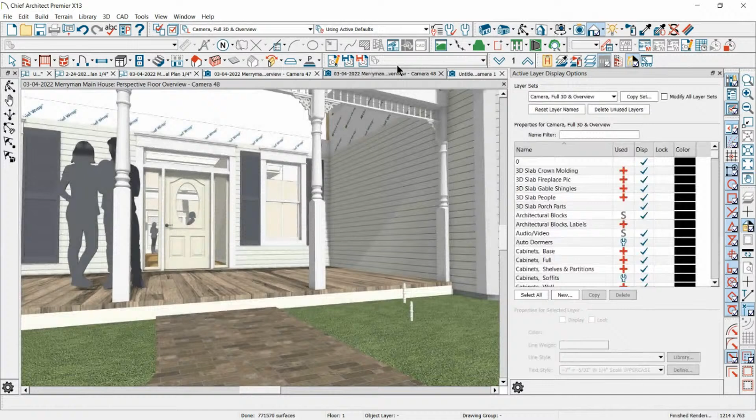Well, what Chief just did is it just made it invisible. I don't know if that message says that, but here's what it did - it made that wall invisible. So until you delete that invisible wall, it will not regenerate. Once I delete that, you can only do it from the floor plan - you can't select an invisible wall in 3D. So there, I deleted it and now it regenerated. So that's what you have to do sometimes.

Sometimes if you've pulled on the wall to change the wall height in the elevation there, it won't regenerate either, I don't think - if you pull the lower wall down or something. Yeah, you're changing it somehow. Right, here it's not going to go down below that point there. Let me - I'll just do that. But here it keeps regenerating, so every time I do that, what the program's doing is it's automatically regenerating it. It's not locking it into place.

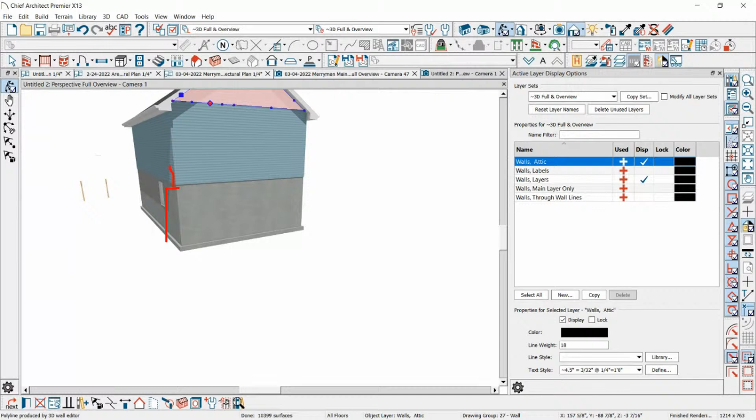Sometimes I'm working on plans and it's like it keeps putting these attic walls in, I don't want them there. A good example might be if you have a lip on your foundation for a brick wall or something, Chief keeps building these walls up on the outside. Or another thing is your plan's running slow because every time you touch something, every time you open and close a dialog box in Chief, it's regenerating the 3D model.

So what you have to do in those cases is go shut the auto rebuild off. You go to 3D view defaults and you go here and turn auto rebuild walls, floors, ceilings off. And just remember that when you do something, if it doesn't change, hit F12 on your keyboard and that will do that function. So I was just working with a client where the plan - you had to wait 10 seconds every time you did something. As soon as we turned that off, we were fine. Okay, so keep that in mind on larger projects.

But in order to get the 3D to look correct, you do have to hit F12. So if I turn that off now, I can stretch my attic walls and they'll stay in place. Actually, this one is not. I don't know why not. Let's make it not an attic wall. Let's uncheck that. I didn't think that mattered.

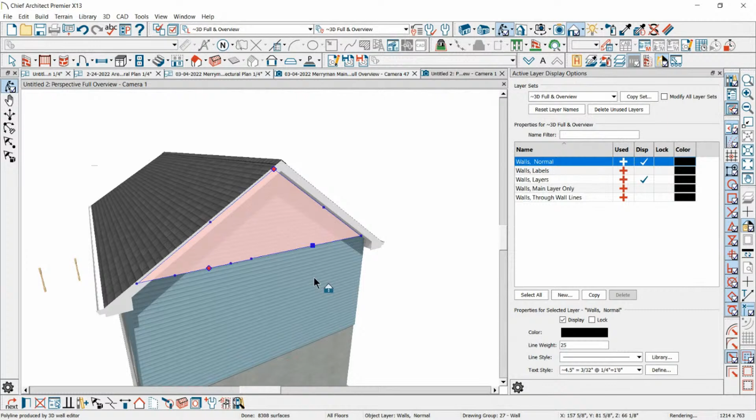Oh, the roof is doing its job, although that's really weird. Normally I can do that. I'm getting all these stupid breaks in here too. Oh, that's because I did that ceiling different. All right, I don't know what was just happening there.

But if I delete that wall, and if I go delete the invisible wall below it—come on, where's my floor plan for that? So if I go, see, there is no invisible wall now. So Chief's not regenerating anything. But as soon as I hit F12, it's going to put that wall back in. So there you go.

Thanks, guys. That was fun.

So, good question. This comment right here, I wanted to make a comment about this. I used to think the same thing. What was that comment? Where'd it go? This one right here: Chief Architect's a program that you trick into doing what you want.

Sometimes. It used to be that way a lot more, but the more I understand the program, and the more I work on it, and the more things I do, it's absolutely amazing. It's just doing what I told it to do when it's not acting right.

Yeah, sometimes the program lulls us into this false sense that it knows what it's really doing. With all that automatic function, like the attic walls—what it was just doing—or the auto roofs, or the auto framing, or the auto this and that, it's like, oh cool, this thing is thinking for me. Well, it's not. The program's really stupid when it comes to that kind of intelligence.